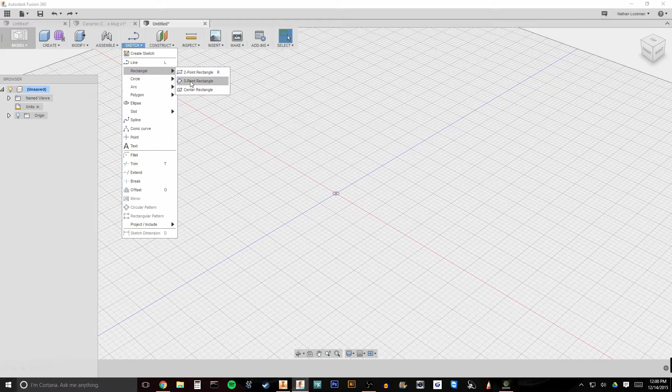Hello everyone, it's Nathan. This is another video response to John Saunders over at NYC CNC, and he's inquiring about some of the management of parameters inside of Fusion 360. So I'm going to go ahead and start creating the part that he made and show you some of the things that I would do a little bit differently to enable more management of the part and scalability.

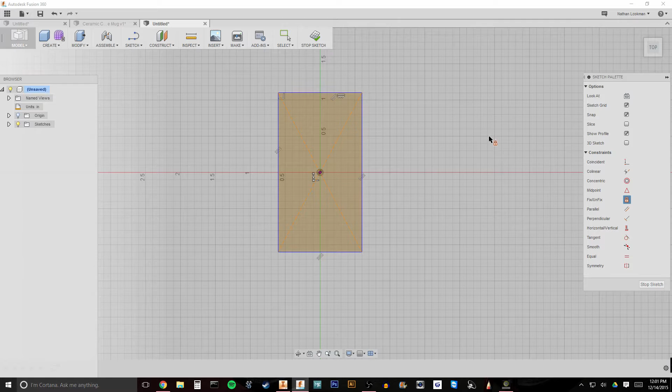Say we wanted to create this part and it was a 1-inch part. There are ways inside of Fusion to be able to scale that from a 1-inch part to a 2-inch part to a 2.57-inch part, however you want to go with that. So inside of this, one of the first things I did was I started by creating a center point rectangle. One of the reasons I do this is by creating a center point rectangle, it is based around the origin instead of another feature outside of space.

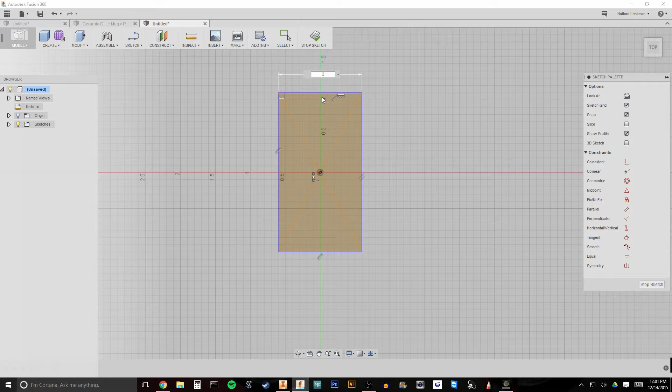So when we scale this part, any symmetries that we have in mirroring or other components can be done off the X and Y axes, and it can create a lot less of a headache later on when you're trying to scale multiple parts, particularly in an assembly. And this way you're not worrying about relocating or remanaging dimensions in the sketch that are redundant. So let's go ahead here and start creating some dimensions. Now this first dimension is going to be what a lot of the rest of the sketch is dimensioned off of, and John Saunders did a great job of explaining this.

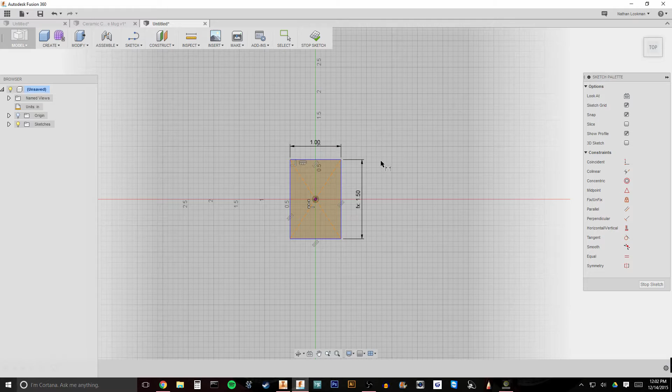The second dimension is going to be a function. So we're going to take that first dimension, which is D1, and we're going to multiply it by 1.5 because we know that is the ratio that a 1-2-3 block uses. And now if you notice, if I click up here and create this as 1, it's scaled. Because of the function here, I didn't have to go in and edit 2 dimensions. I was able to edit just 1 dimension right here. And because I only had the center point rectangle versus a rectangle in the upper right hand quadrant, I'm able to keep everything centered on the origin.

Now the next effect that he utilized was Microsoft Excel, and he created some programs inside of Excel to mathematically figure out where the rest of these holes are placed. And I just want to show that a lot of those functions can be done inside of Fusion 360. Systems like Inventor or Creo or a number of the bigger parametric modeling softwares are capable of actually utilizing Microsoft Excel files. However, inside of Fusion 360, that's not something that they focused on.

So I want to show how you can create those functions inside of Fusion 360, so you wouldn't have to be going back and forth changing all those dimensions, and this will become a truly scalable model right inside of it from a couple of dimensions. So this right here, we're going to dimension, and we are going to utilize another formula. And I'll explain this here in a moment if you bear with me.

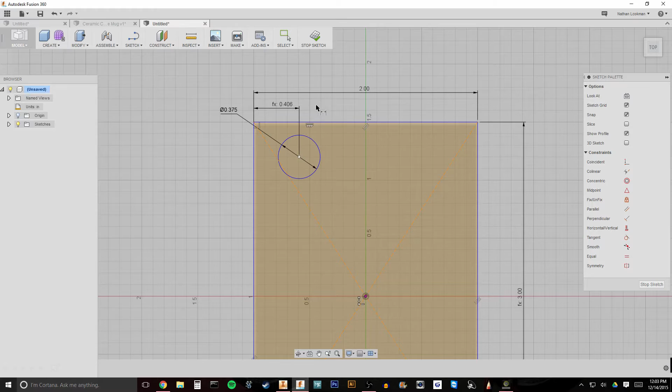Now, if you've seen John Saunders' video, this is the same number he got. This is just abbreviating it a little bit more. I don't have my rounding out as far as he does, but 0.40625 is rounding up to 0.406. But you can see that we got the exact same dimension. Now, if I hover over this, it's going to show me the formula. And actually, let me click on this so I can explain it to you. This is the formula that we used.

Now, D1 is our first dimension, and that's the 2 inches. And the reason we're trying to do this all inside of Fusion 360 is so that we can literally take this D1, edit only it, and everything will repopulate in the dimension when we want to scale this to a 2-4-6 block instead of a 1-2-3 block.

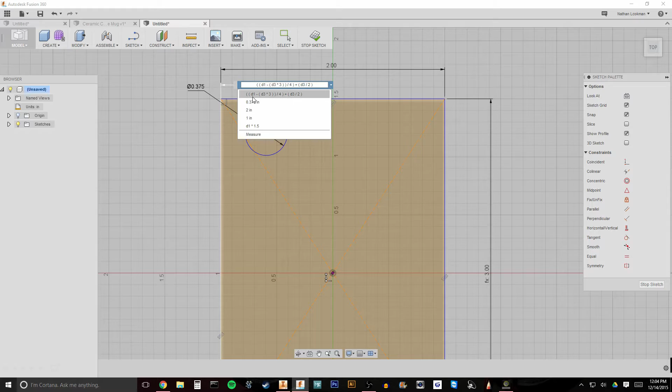Now, D1, this is the 2 inches, so it's what we'll call the width of the part, and the width of the part minus D3, which is our hole dimension, times 3, because there's going to be 3 of them across the width of the part. So D3 times 3, all of this, D1 minus all the holes. What that's going to leave and show us is the remaining space that's going to be between this hole and the next hole and the next hole and the edges. And by doing this, we now have the math for the spacing in between each of our parts.

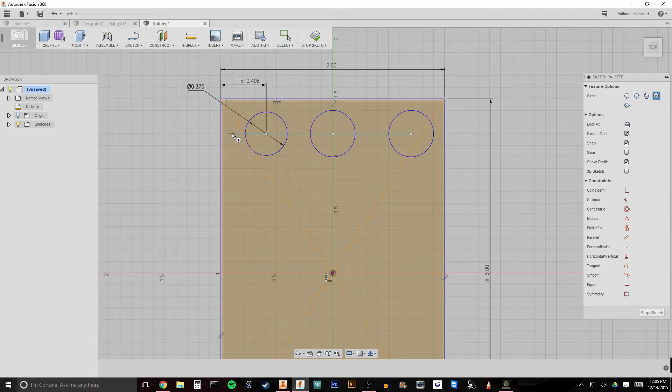And by dividing that by 4 now, all of that space divided by 4 is just the nature of having 3 holes in a row. There are 3 holes here. Let me just draw them out for you. If we have 3 holes in a line, we're also going to have 4 spaces that we have to make up for. So when we create this pattern, we want to know the math between exactly how much space is between this wall and this hole, and this hole and this hole.

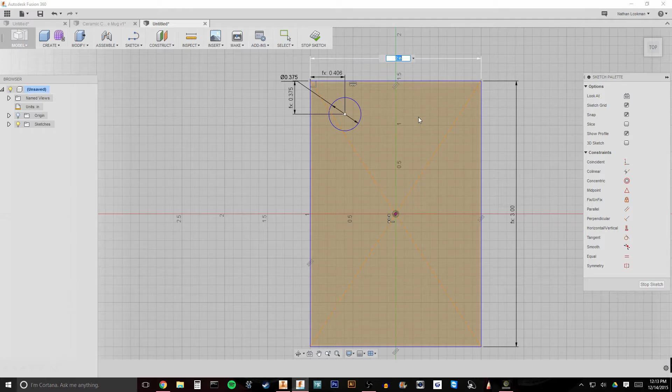And as you can see, by adding in the change in dimensions from D1 to D2, and changing the number of holes that we're going to be having to 5, and thus the number of spaces to 6, we now have 2 functions instead of just numbers. So when we go in and change this dimension, everything scales. As you can see, this is no longer 0.375 inches from the top. It's scaled as a basis of that function. So we'll go back to 2 and we'll continue with the project.

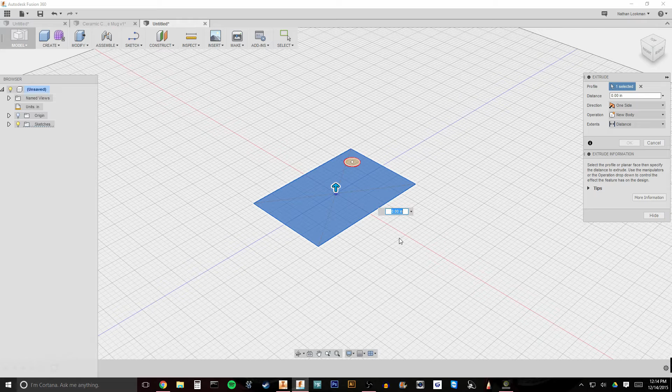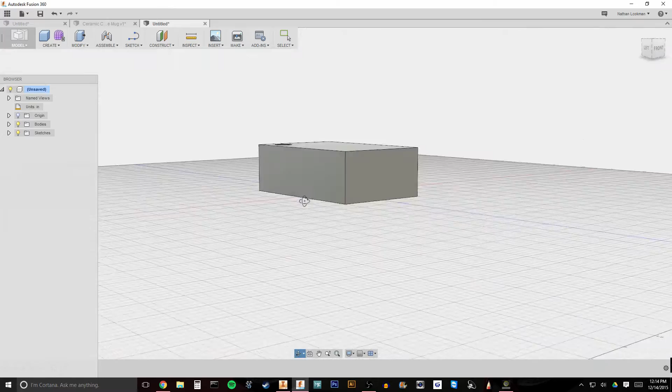So we'll stop this sketch, modify, create extrude. And the first dimension we started with was D1. Now all dimension names are case sensitive, as John Saunders pointed out. So to work with D1, you need to go with D1 and then divide that by 2. So once again, we're focusing on keeping everything as a function so that when we scale those numbers, everything scales with it. And now we've got the beginning of a 1, 2, 3 block.

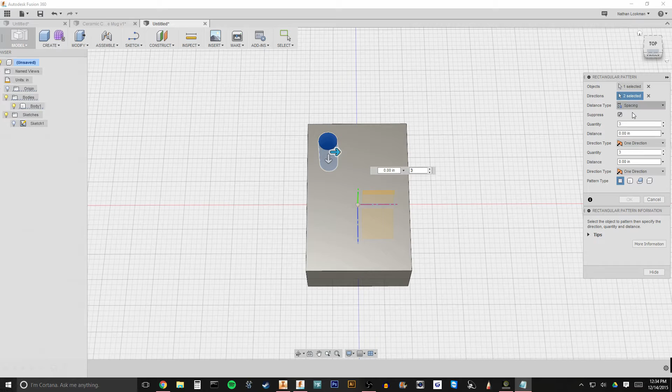Now we're going to create a pattern of the hole that we were left with when we extruded it. Pattern, rectangular pattern, select the feature, select the directions and the X and Y axes, and we're going to do spacing. So previously when we were doing the spacing between the wall and the circle, our equation, which we're going to be using again, looked like this. And this D3 divided by 2 here is the radius of the circle, because we had a flat edge going up to the radius.

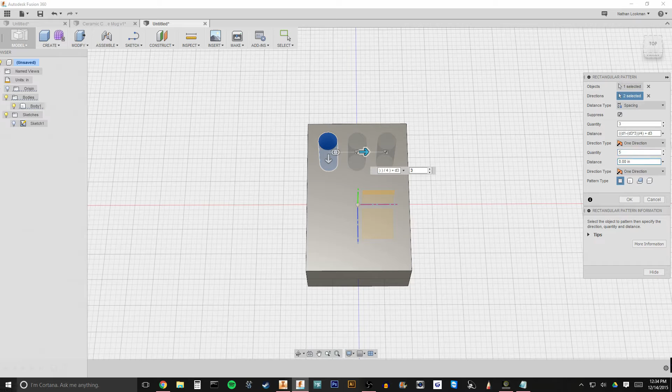Now we're going again between the center points of the circle, which are right here and here, so we need to be adding in the diameter instead of the radius. So just by taking out that divided by 2, you can see the spacing is nice and equal now, and we're filling the part. Now on the bottom here, we've got 5 holes that we put in, and we're going to use the same equation we used for the Y separation right up here. And as you can see, we've got fully spread out holes. They all look to be symmetrical and equal. Hit OK, and there are holes.

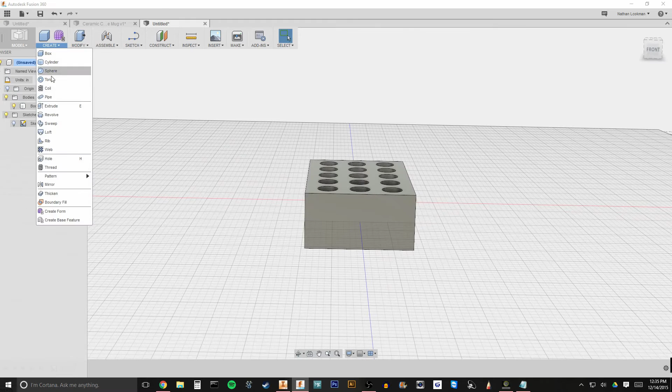Now coming onto the side here, sketch, and I'm going to project geometry. So I'm going to go look at the origin over here. My apologies, I happen to have moved this. And I'm going to project the x-axis, and I'm going to project the y-axis, and make these construction lines. And I'm going to create a circle. And instead of creating a specific dimension on a circle, I'm simply going to enter in D3. So these are going to imitate every time the exact dimension of that one circle.

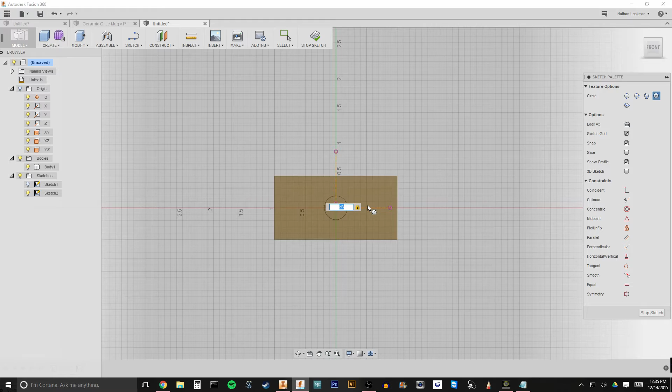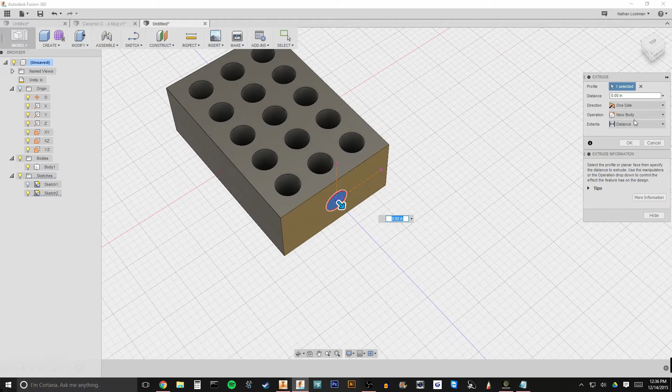Once again, in parametric modeling, it's all about creating as few parent dimensions as possible, those first couple dimensions that everything else references. That allows each of these pieces to be scalable. Now we'll stop sketch, extrude, and we're going the wrong way there. But instead of using a dimension, once again, D2, negative D2. Usually the cut would reverse it for us, but in this case we're going to have to manually do it. Hit OK, and we've cut all the way through the part.

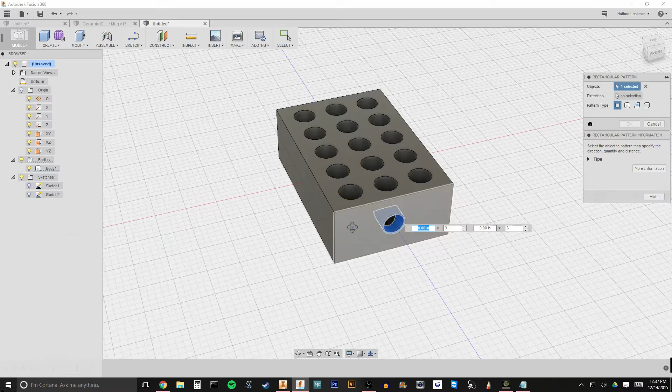Now once again we're going to create a pattern. Select the feature. In this case, we're going to select the feature from down here to make sure that we're getting the entire cut versus just the beginning cut. If you notice, when I selected initially the pattern feature, I was only able to select these faces, and we didn't select the rest of the faces that go all the way through the part. So oftentimes, unless you want to only be patterning a portion of what you're originally intending, go down here to the history, select the entire extrusion.

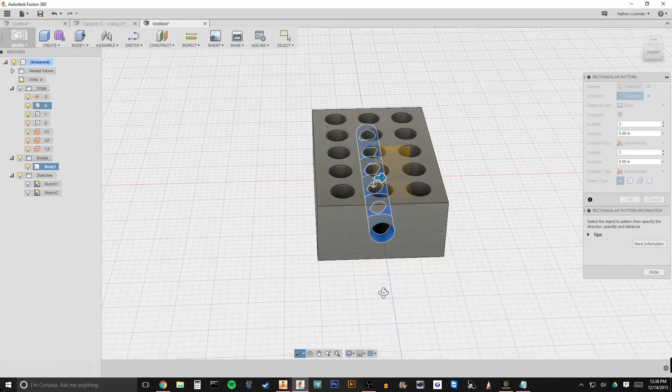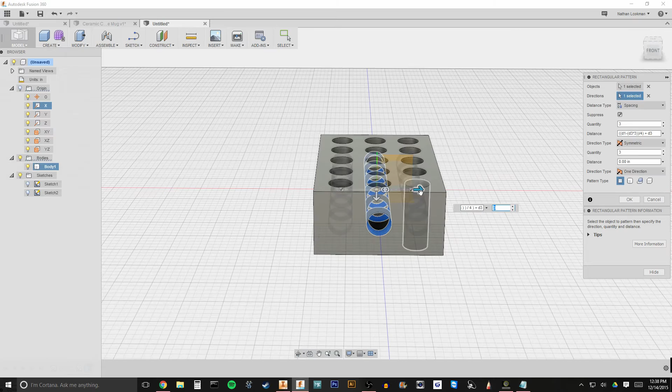Directions, this pattern, now we only have one hole on this edge, so that pattern only has one direction. And we're looking again, use the X. Instead of doing one direction, do symmetric. So it's going to go in only one direction, one axis. However, it's going to go both directions on the axis, the positive direction as well as the negative direction. And those look to be symmetrical. Hit OK. And we have them in place.

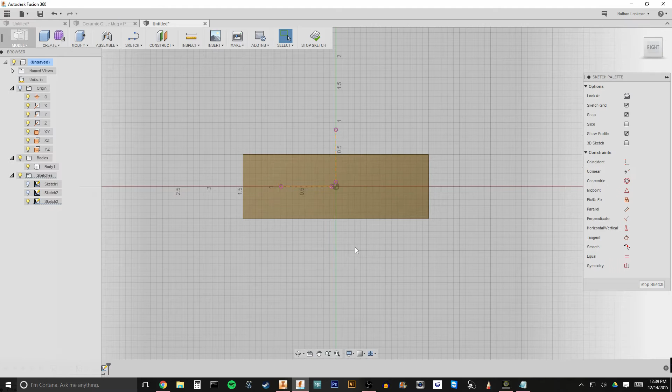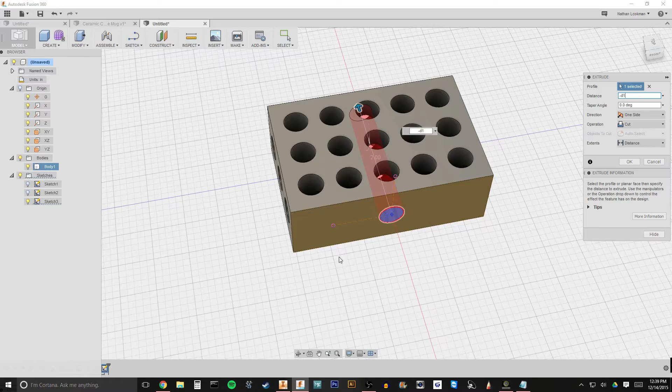Creating another sketch. This face. Once again, we're going to project the X and Y, Z axes in this case. Place in a center point circle. D3, this dimension of our circle, will always stay the same. Finish sketch. Extrude that. I'm going to go negative D1. That's going to put us all the way through to the outer edge. OK.

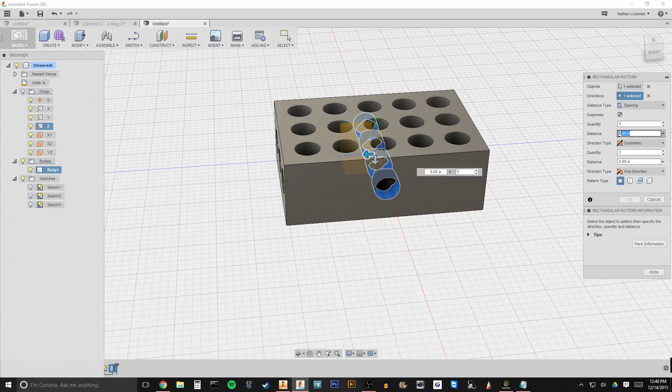Create a pattern. Directions, the Z-axis, and again we're going to go spacing and symmetric. There's going to be 5 holes this time, and we're going to use the same equation that we utilized previously. There we are. Hit enter. We've got our 1, 2, 3 block. And there's a number of things we can do here, add threading and chamfers. I'll go ahead and add a chamfer onto the edges here.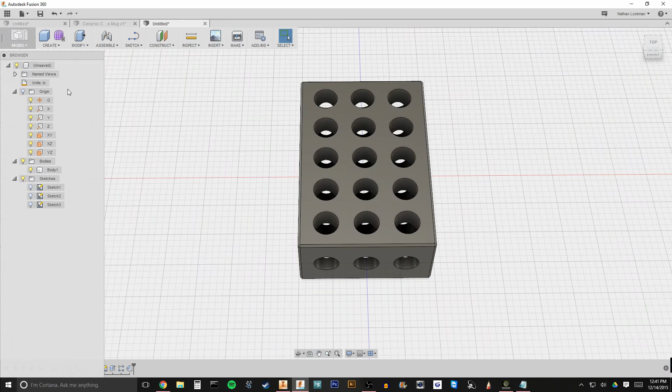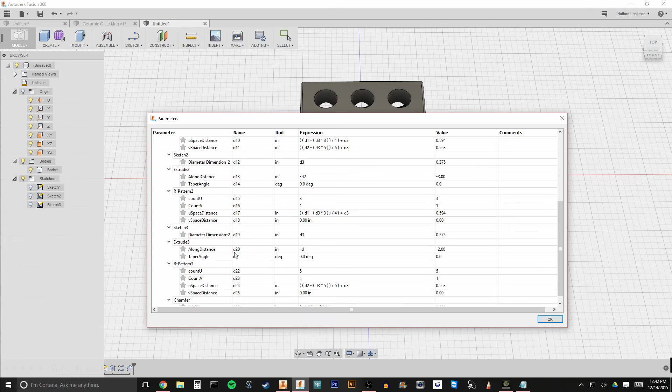So down here into modify, change parameters, and this is going to look a little bit complicated, but I promise it's not. If we go down here and open up all these submenus, what we're literally seeing is every single parameter or dimension that we've created in the entire history of this project. So if we expand this open, the reason we've created all of these different equations is so that we don't have to worry about every single one of them.

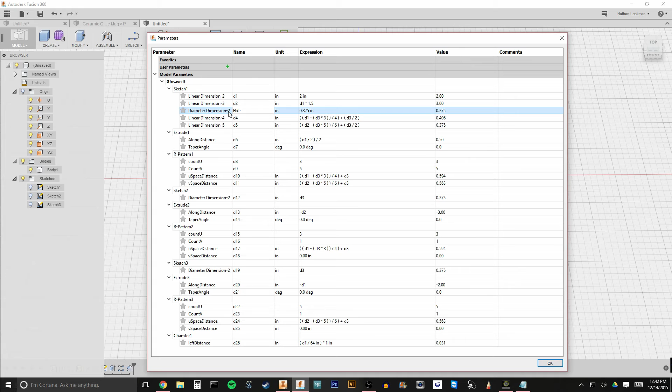The only 2 that we care about is this linear dimension, which is D1. We see the name here, and we see the expression, which is 2 inches. That's the first dimension that everything else is featured off of. D3 is the other dimension. That's the dimension of the hole. Now, one of the biggest powers that we have inside of the parameters management is creating a name. We'll simply name this hole diameter. I apologize. You have to keep it in a single word.

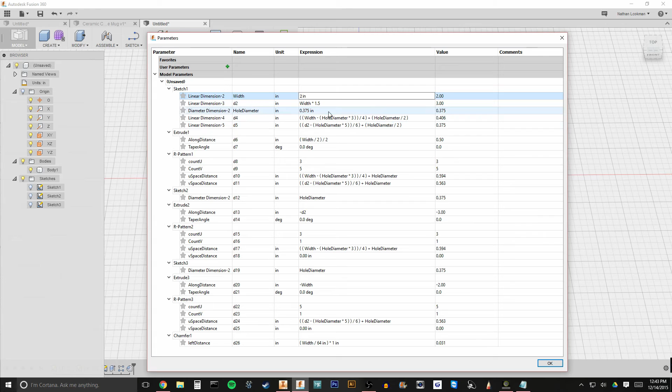And here we're going to create, what do we want to call this? Width. Now remember, parameter names are case sensitive, so you're going to have to type this exactly letter for letter the way that you typed it. But we can go in here now, and if we were to hit OK, let's save this file. And I'm going to call it a base because it's something that I use to describe something that I can modify. So we're going to exit out of this, our 123 block base.

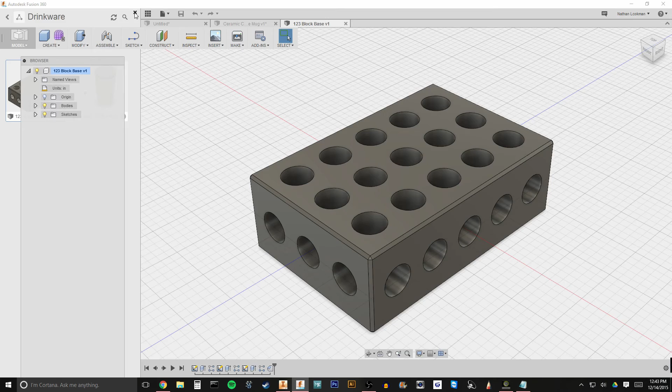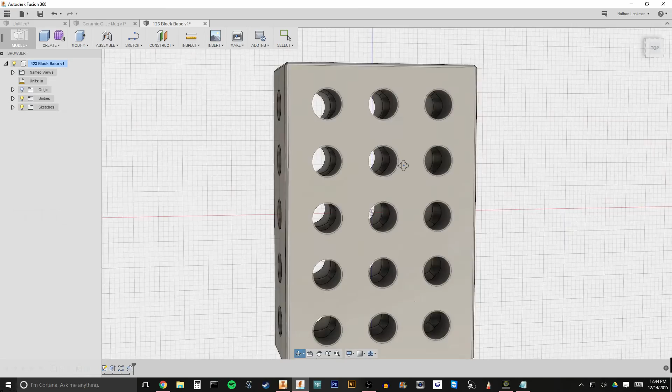Now coming from absolutely nothing here, we're not going to open up a sketch, we're not going to open up anything. The only thing we're going to pull up is change parameters. I want to scale this. Let's go ahead and make this a 246 block. Change this to 4 inches, and change this hole dimension to 5/8. Hit OK. We haven't done a single thing inside of the sketch, and let's go ahead and do an inspection. Inspect from here to here, and you'll notice the distance between these two faces is 4 inches now.

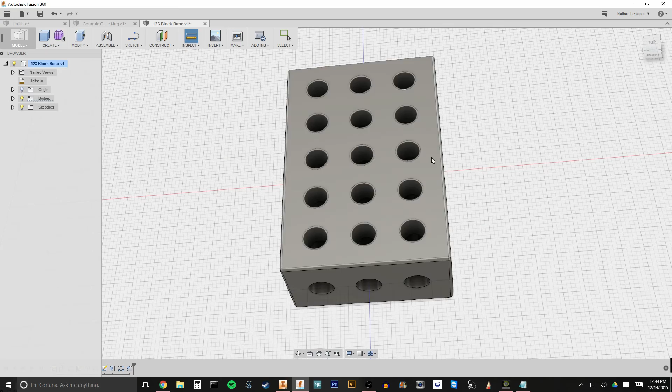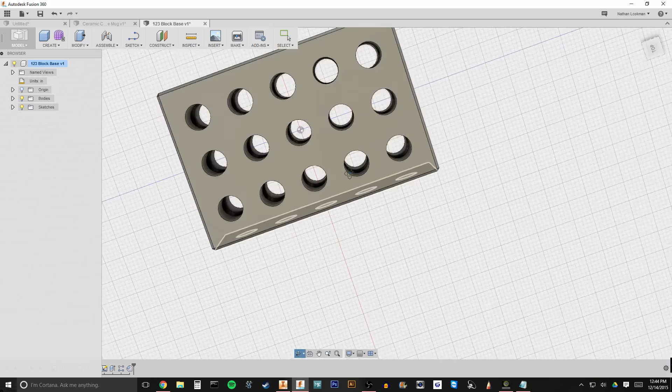Let's go ahead and inspect from here to here. Oh, I'm sorry, we have to inspect again. Here to here. Look at distance 6 inches. All of these holes are symmetrical. We don't have to worry about changing any dimension inside of these sketches. We don't have to recreate a pattern. Absolutely nothing. Everything is done for us. And one of the biggest things in this is, if you see the axes that are going through these holes into the origin, this is based on the origin, and it can expand and contract as we want it to.

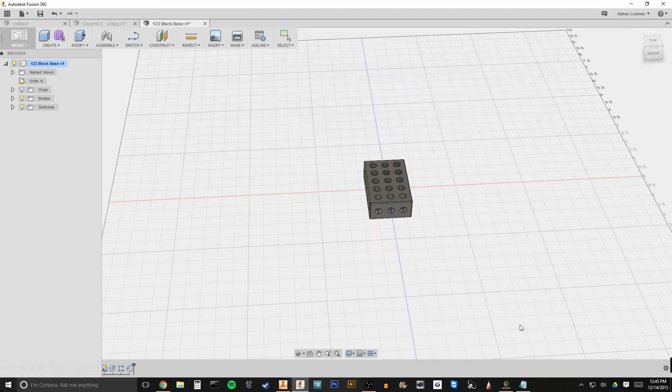Let's go ahead and modify this. It doesn't have to be a whole number. Let's do 1.5 here. Something that doesn't actually exist, but I'm going to say maybe that has to be a 1/4 inch. Voila. Let's take a look at an inspection. Measure this to the distance between these two faces, and 1.5 inches.

So this is a really powerful aspect of parametric modeling, and most of the time you're not going to necessarily have to utilize this, but say for example you have to create something that's a pin, and you're going to be using this pin in a bunch of different assemblies and projects that may be smaller or larger, and you always want to have that similar degree of chamfer or for example a degree of slope to it in a mold or something like that. All you have to do now is create one of them, go into your part file, modify the parameters, change its hole diameter or a screw's diameter, and then exit out and save it as a new part file.

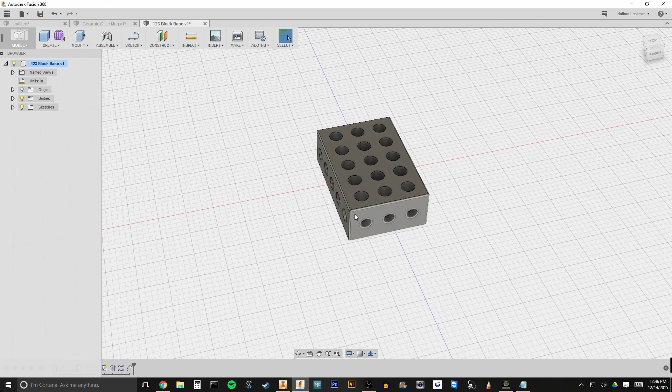Instead of having the redundancy of recreating parts, the core of parametric modeling is the fact that you're able to create something with reference geometry and reference dimensions. And every single one of these pieces is going to be scalable and modelable without having to go in and recreate a sketch or create a part from scratch. So hopefully this is helpful.

I know it's a little bit long-winded, but John particularly, hopefully you get a little bit of information off of this. It's great to see you getting to some more of the advanced features of parametric modeling. It's incredible to see it fleshed out inside of Fusion 360. Thanks.